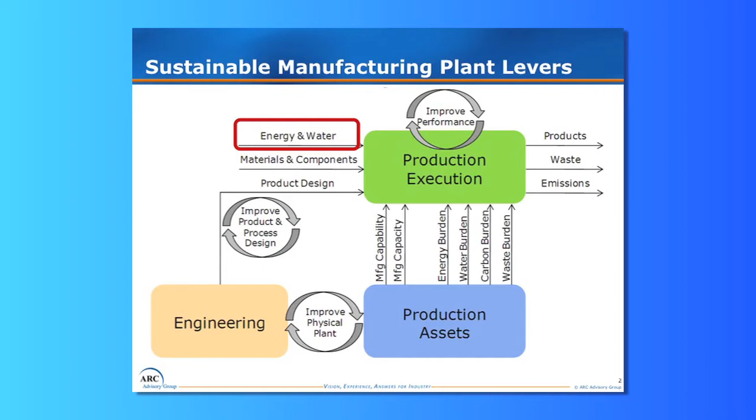And of course, energy and water is part of your production execution, and your products and waste and emissions are what comes out the other side, and you want it to be mostly products and not so much waste and emissions.

Second point I want to make is that there's a lot of energy-related issues related to major costs in today's industrial plants. Energy prices, if anyone hasn't noticed, are uncontrollable or at least variable, and they play a big factor, particularly in some of the energy-intensive industries, which I'll mention in a moment.

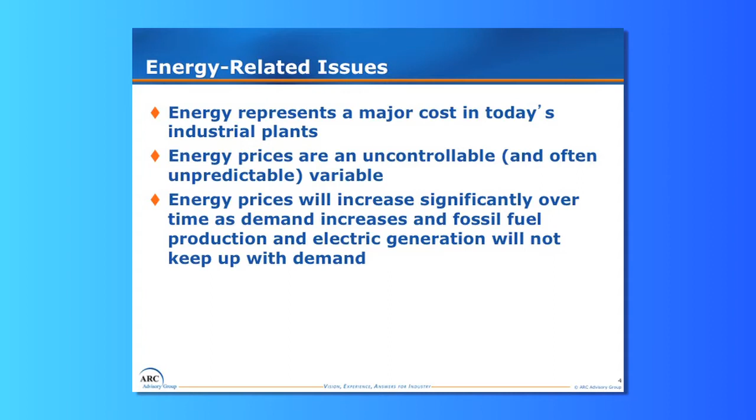Energy prices will continue to increase. Every forecast I've seen says that energy will increase in price. The demand in energy will continue to grow. Fossil fuel production is going to become limited, although it seems like as long as I've been in the business, I've thought we'd eventually run out of fossil fuels, but they seem to keep finding new ways to make fossil fuels, so maybe it'll be a long time after I'm retired.

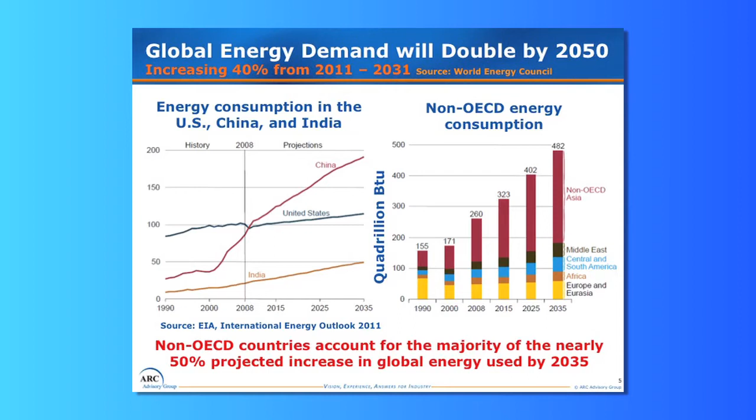According to some government statistics, energy consumption is going to grow between the end of last year and 2031 by 40%. And guess where most of that consumption is going to grow? It's going to grow in the emerging countries of China, India, and the like, to the point where out in 2035, most of that energy consumption is going to be in the non-OECD countries.

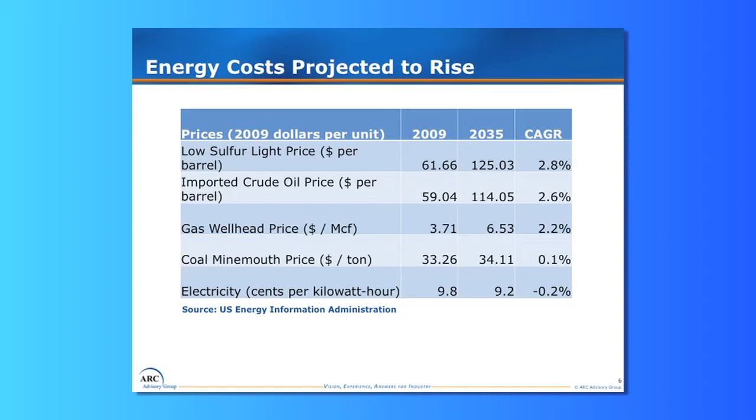And the cost of energy is continuing to rise. In fact, I just did a spot check before I came to this session, just around lunchtime, and crude oil prices, in case anybody tracks it, is $98.5 a barrel right now. And imagining it's going to be 125, I think that's a low estimate frankly. But anyway, those energy costs are going to continue to grow.

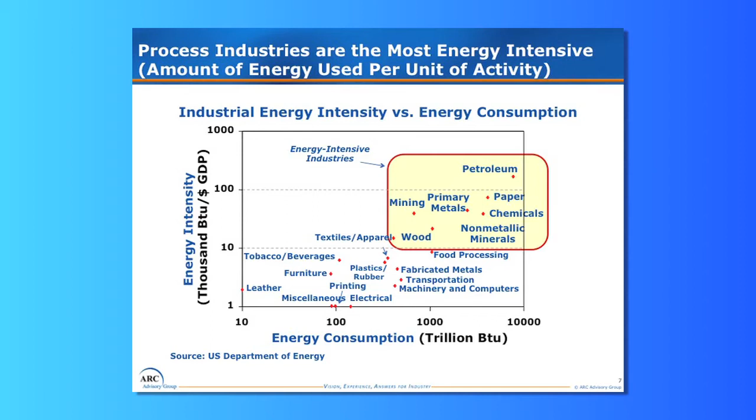Now, where are the big industrial energy consumers? Well, they happen to be the industries circled here in the process industries. So it takes a lot of energy in the petroleum industry to produce petroleum products - no big surprise there. But the paper industry, we have one of the speakers talking about paper today, and that's a very big energy consumer, as is the other industries you see there.

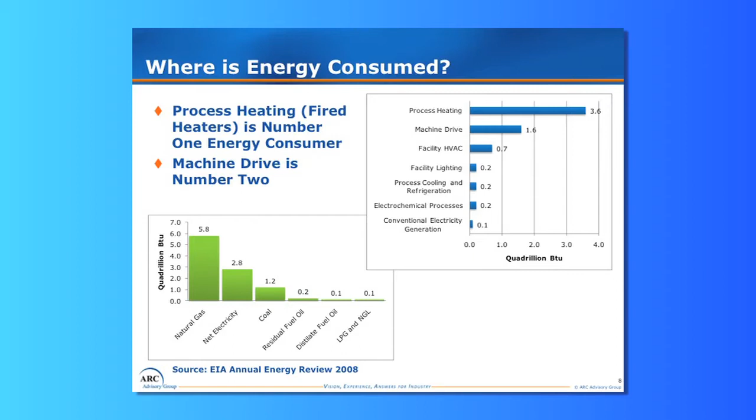Also, within the energy consumption of industry, where is it consumed? Well, a big consuming source is process heating. In my earlier days when I worked in oil refining, we had fired heaters everywhere. And today, the goal is to capture as much of that heat that you need to use to make your products, but recapture it, reuse it. Machine drives are number two. HVAC facility is a third place, and so forth. At the same time, you can see that natural gas is a big source of energy that's being consumed.

Now, water-related issues - water is another very important factor. In fact, last year this session was dedicated to energy only, but looking forward, water is becoming the scarce commodity of the future. We need it for humans.

We need something to put our vodka into, right? So water is a very important ingredient in our human existence. It certainly is important in agriculture, but it is a critical factor in industry.

The water stress is increasing. Issues around the world, there's not enough water in certain parts of the world. Water is required for many industrial processes, and in fact, if you look at the entire cycle of products, it's amazing how much water plays in the production of products.

For example, I was at an OSI event this summer, and I guess I was taken by surprise when we talked about the amount of water that goes into the manufacturing of an automobile. I just didn't sort of put the two together. I wasn't thinking of water being an important factor.

But the next time you get into your luxury SUV and you sit into that comfortable leather seat, just think about how much water it took to get that leather seat in that car. It's amazing how much water.

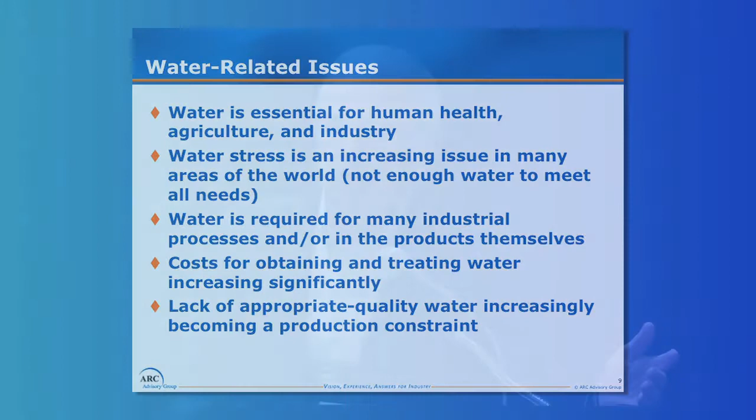So the cost of obtaining and treating water is increasing significantly. Lack of appropriate quality water is becoming a production constraint. I don't know how many people here have made decisions whether to start or close a facility due to water shortage or water availability. It's a big factor in terms of deciding where to build certain kinds of plants, particularly the water-intensive plants.

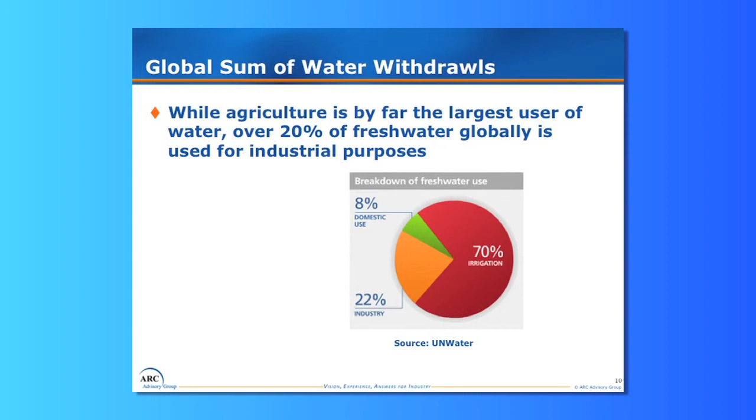Now, agriculture, of course, is a big water user, but over 20% of fresh water globally is used in industrial processes. Now, there's an organization out there, the Water Footprint Network. I thought it was kind of interesting. My associate found this slide for me, and it talks about looking at water from a standpoint of both the consumption as well as the water pollution. So you can see the colors: green water, blue water, and of course gray water, not good.

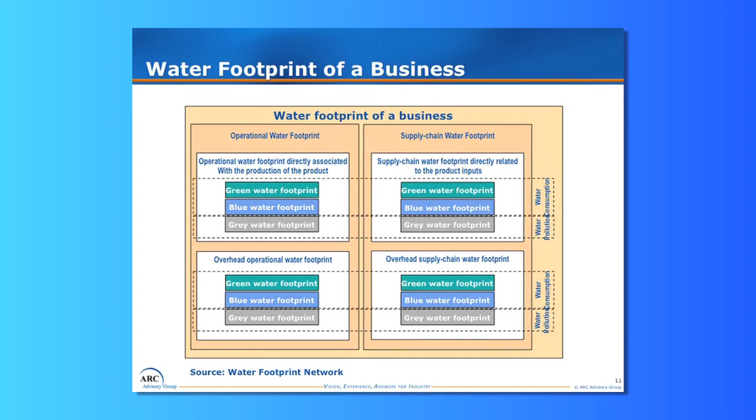So you look at that from an operational point of view as to how much water you consume, how much you recycle, how much turns into gray water and waste. And then you also should look at the water in terms of supply chain. So my example of the leather seats is a good example of how water goes through the entire process all the way back to the cattle that originated the leather that was put into the seats.

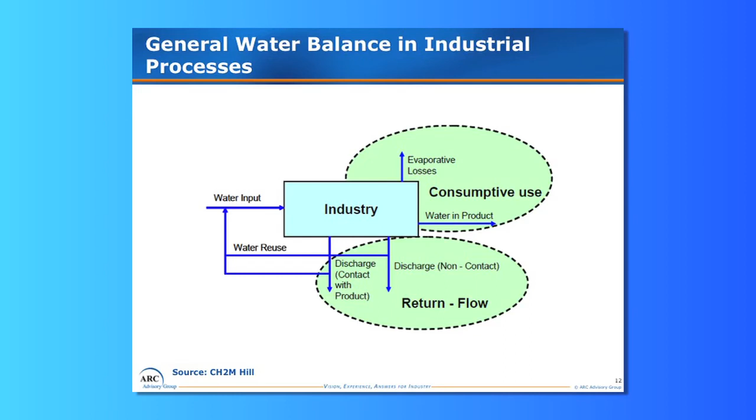And of course, general water balance. There's water that comes in and is consumed as part of the product you're making. In some industries, water is an important ingredient in the actual end product. Then there's evaporative losses, and of course there's water being recycled or returned to the ground.

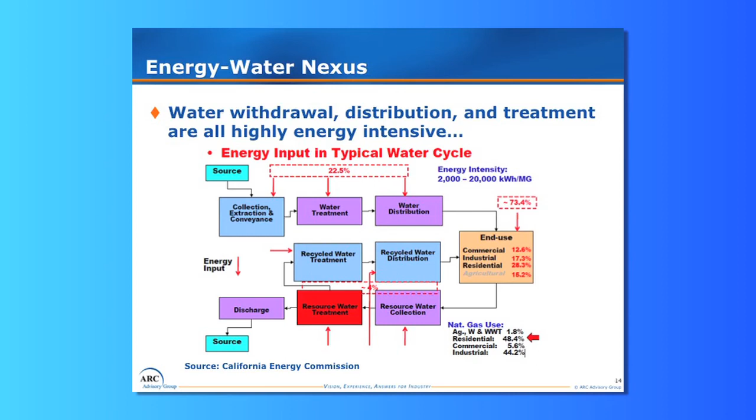And finally, to talk about where energy and water come together, it takes a lot of energy to purify the water once it's been contaminated, and also there's a lot of usage of water in the production of energy. So without going much further than that, I wanted to make the connection between water and energy.

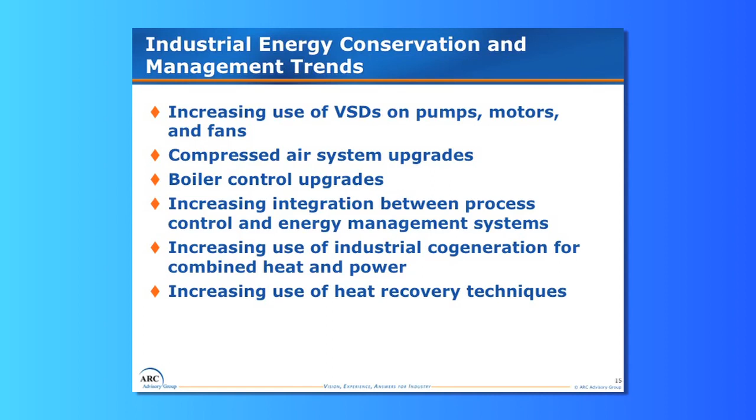And there's a lot of things going on today. Increased use of variable speed drives on pumps, which help the energy situation. Compressed air systems, a big source of loss, as well as water leakage in the plant. These are kind of things that can be done, measures that can be taken, and I'm sure our speakers are going to talk a little bit about some of these ideas. And then, of course, greater diligence to identify and repair water leaks and so forth.

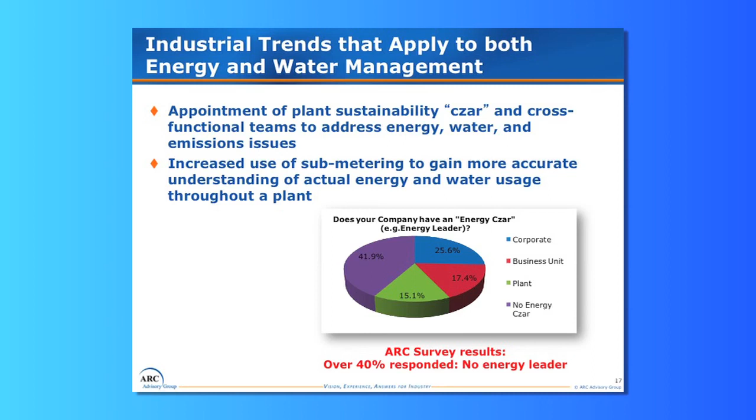Finally, a year or so ago, we did a survey to talk mostly about energy, and just to get an idea of how well manufacturers are managing their energy. And you could extend this to think in terms of sustainability. So we asked the question, do you have a leader or a czar of energy? And we were a little bit surprised to find that over 40% of the respondents said they have no such energy leader in their company. So they leave it up to plants or some local authority.

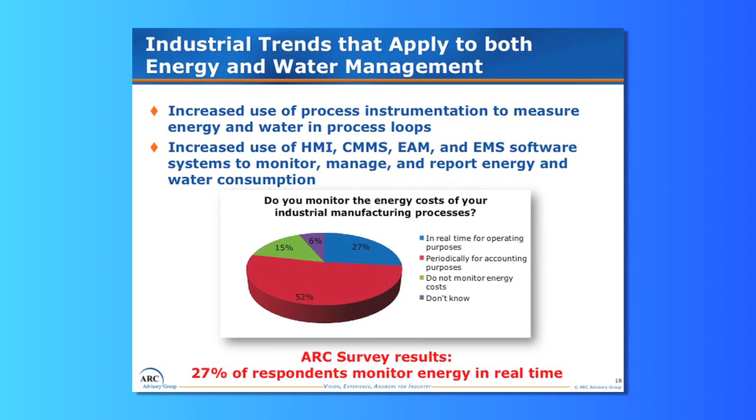Furthermore, we asked if there was measurements to measure what's going on with the energy and the water. And we found again, a lot of plants that are very under-instrumented when it comes to measuring these critical resources. So with that, I thank you for your attention for my part of this presentation.